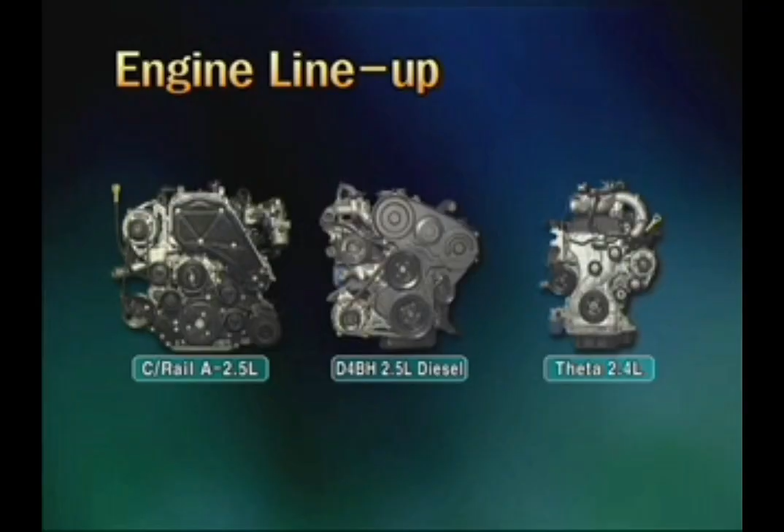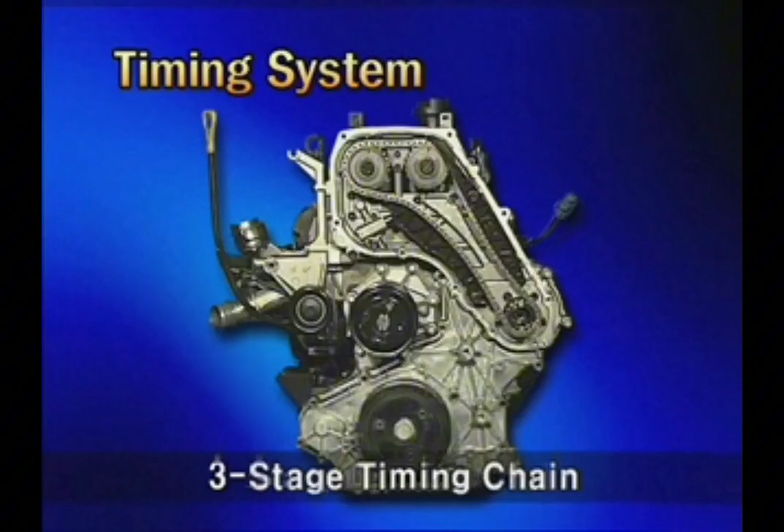The A engine is applied with the single roller bush-type 3-stage timing chain. The components are chain B linking the crankshaft to the oil pump and the RH balance shaft, chain A linking the crankshaft to the high-pressure pump and LH balance shaft, and chain C linking the high-pressure pump to the intake exhaust camshaft. Let's study the timing mark of each chain.

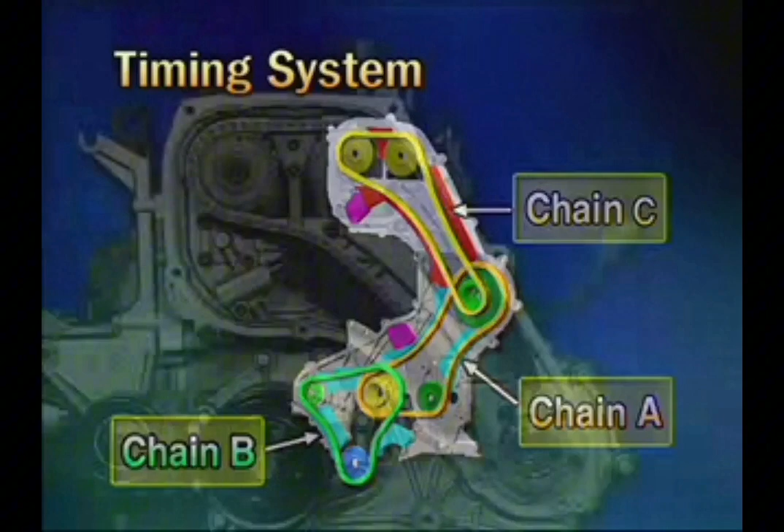First, chain C is for aligning the timing marks of the high-pressure pump and the camshaft. Next, chain B is for aligning the timing marks of the crankshaft and the RH balance shaft. Finally, chain A is for aligning the timing marks of the crankshaft, high-pressure pump, and the LH balance shaft.

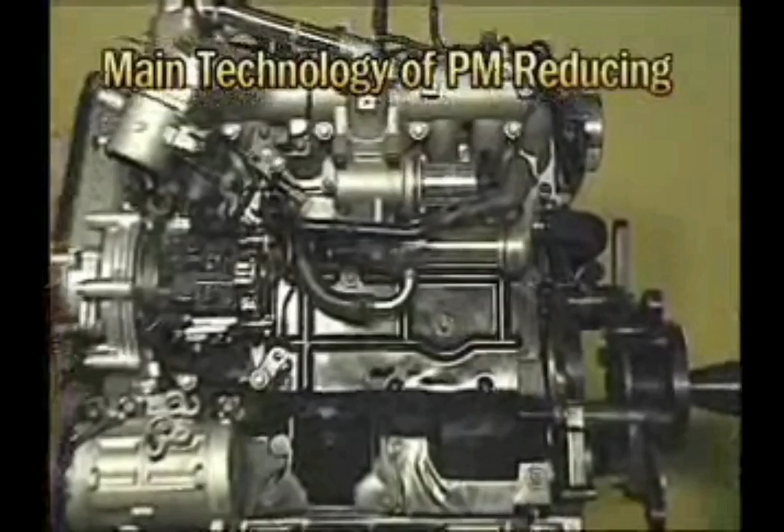For the A engine of the new H1, a water cooling type EGR cooler is installed for decreasing the temperature of exhausted gas which will be recirculated. The EGR valve returns some portion of the exhausted gas to the intake air route for reducing NOx. As the engine ECM receives signals from every sensor, it performs duty control of the EGR solenoid valve to control the amount of air newly inhaled.

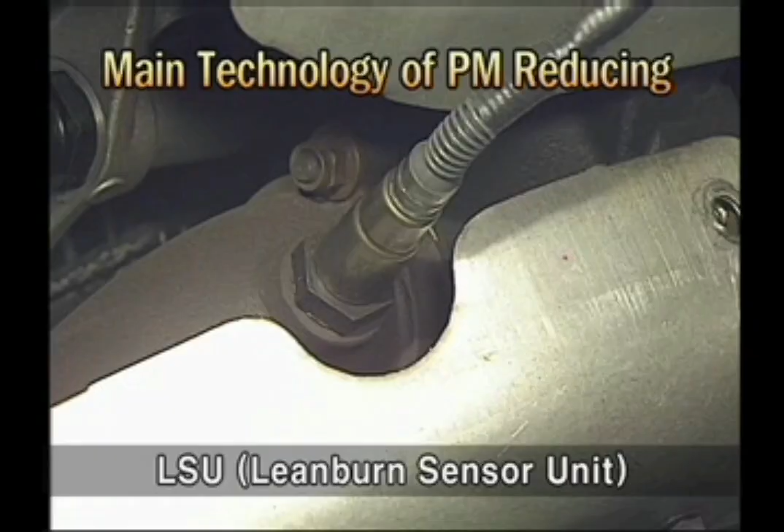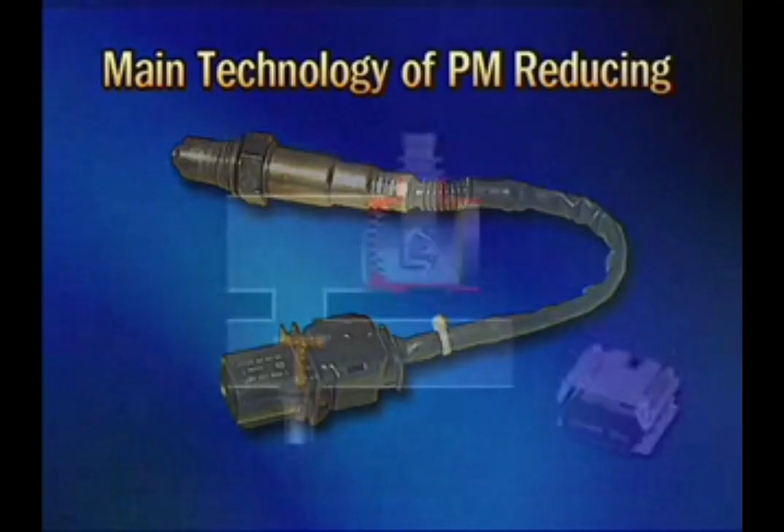Further, the new H1 A engine is equipped with the lean burn sensor unit, an all-range oxygen sensor. The LSU installed in the diesel engine detects the amount of oxygen in the exhausted gas to control the EGR valve. The output value of air amount inhaled into the MAFS, mass airflow sensor, is acquired by subtracting the recirculated amount of exhausted gas from the total air amount inhaled into the combustion chamber.

The ECM estimates the EGR rate using this value. Even though the EGR valve can be controlled similar to the set value at ECM using the EGR rate calculated by this method, it cannot use the feedback concept.

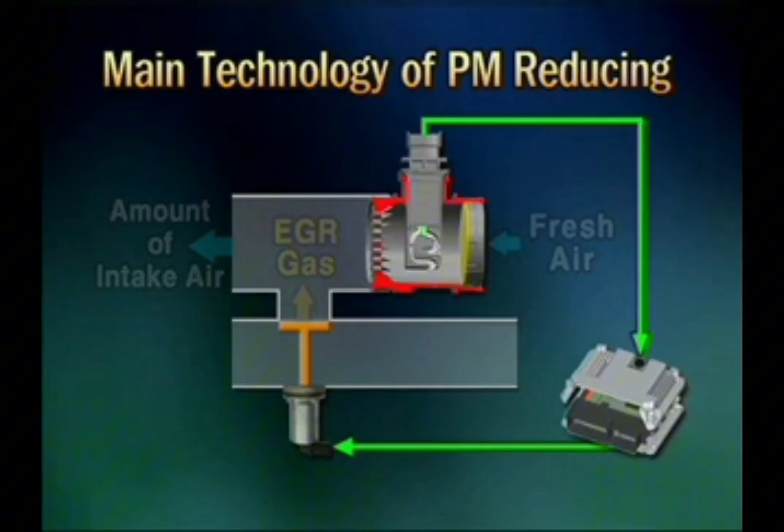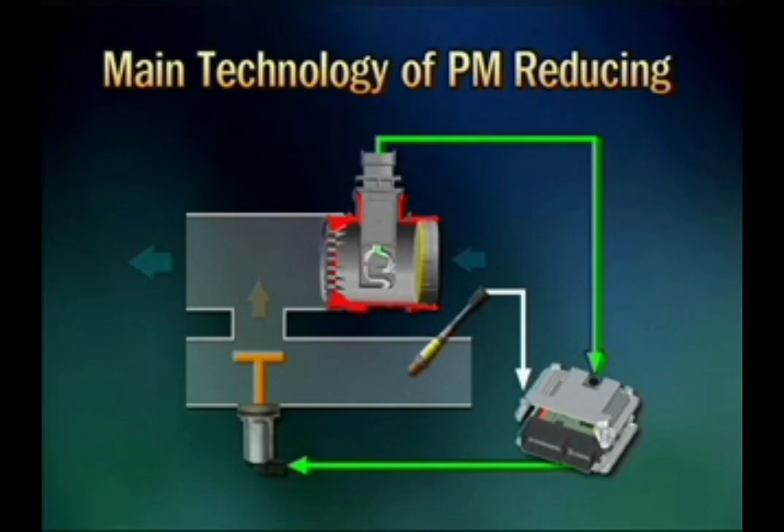Therefore, the new A 2.5 engine has the LSU all-range oxygen sensor for receiving the result of ECM control through the sensor so that the feedback concept can be applied. As a result, precise EGR control and fuel amount control can be ensured.

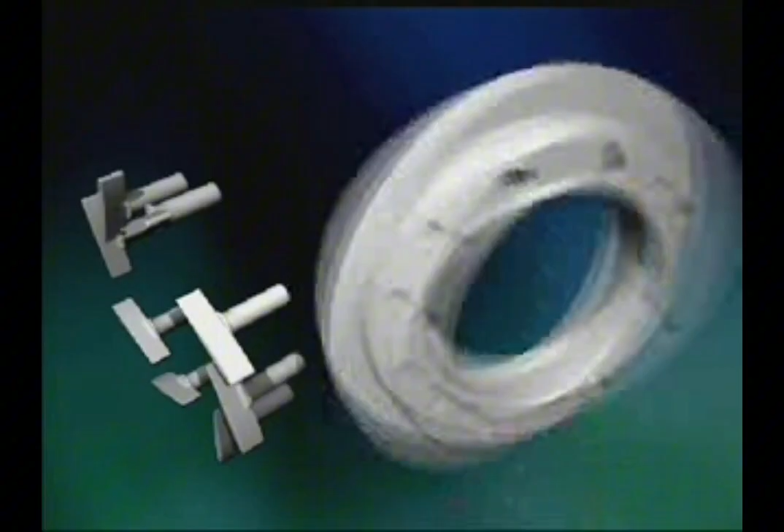The turbocharger of the new H1 A engine is the VGT type, which makes the turbocharging effect at all ranges of engine operation. The internal structure of VGT is comprised of turbocharger units including the variable inlet vane. This VGT is assembled at the turbine housing side.

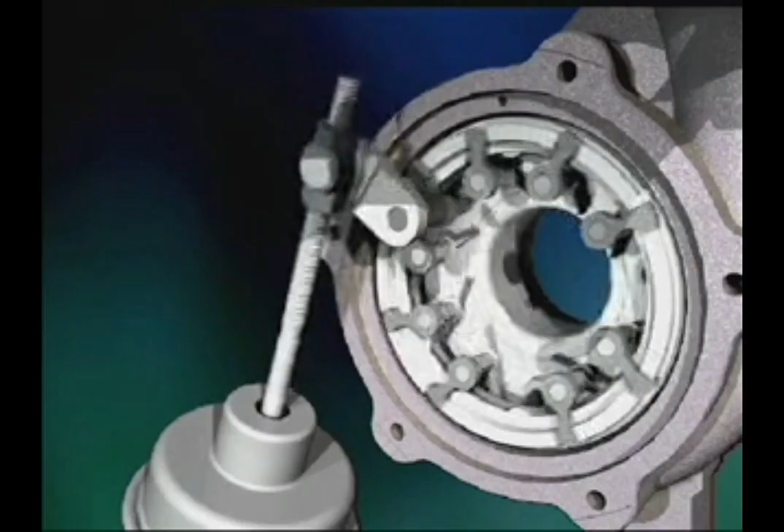The external crank is assembled at the VGT. It is linked to the vane actuator through the link. The turbine shaft having the turbine wheel and compressor wheel is installed here, and then the compressor housing is assembled.

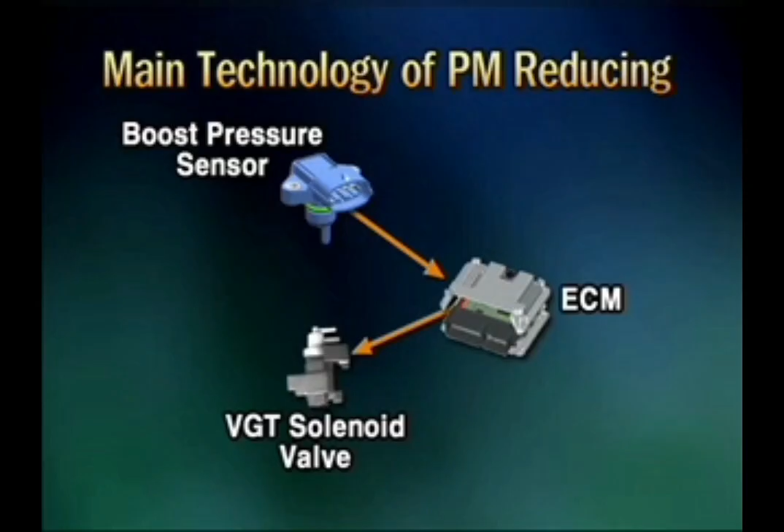The ECM performs the precise duty control of VGT in the H1 engine. The ECM receives input signals from the boost pressure sensor and performs duty control of the VGT solenoid valve to control the vane angle in VGT.

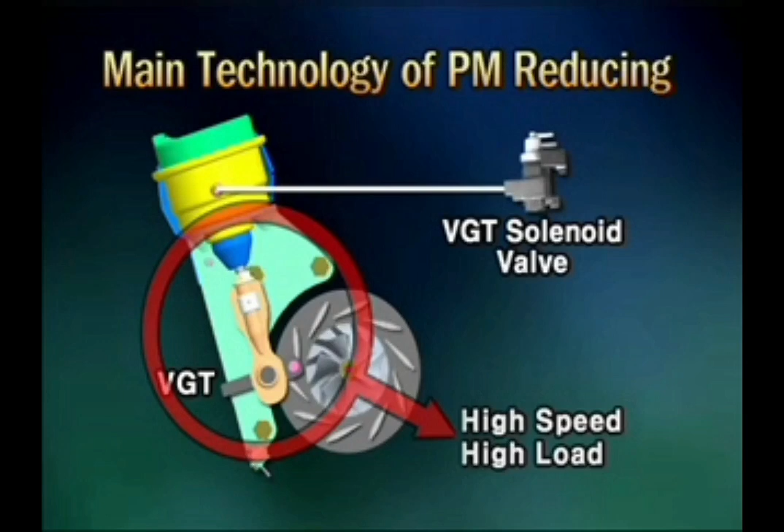At low speed and low load conditions, it opens the angle of the VGT vane small to increase the speed of the compressor wheel so that the turbocharging effect is increased. As it gets to higher speed and higher load conditions, the VGT vane angle gets wider to control turbocharging without overpressure.

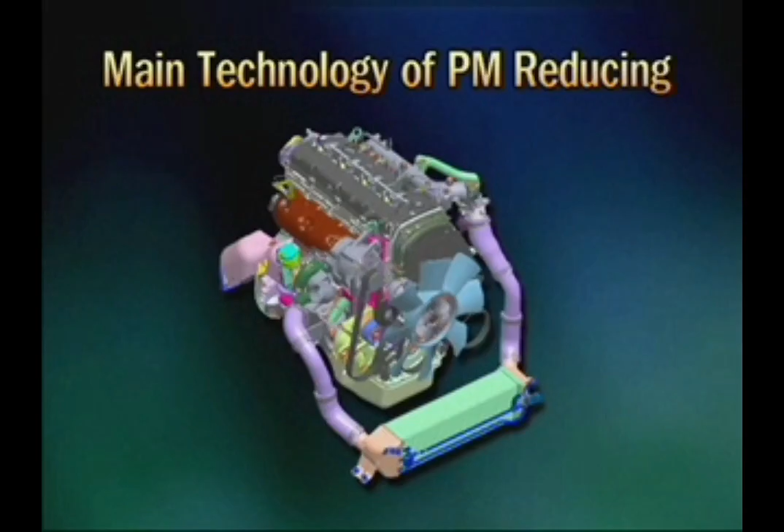The intercooler of the A engine is installed at the front side of the vehicle. The capacity is changed to 5.7 liters, which is 1.5 liters larger than the conventional 4.2 liters. An additional intercooler fan is not installed, but the air temperature in the intercooler can be lowered by the wind generated while driving.

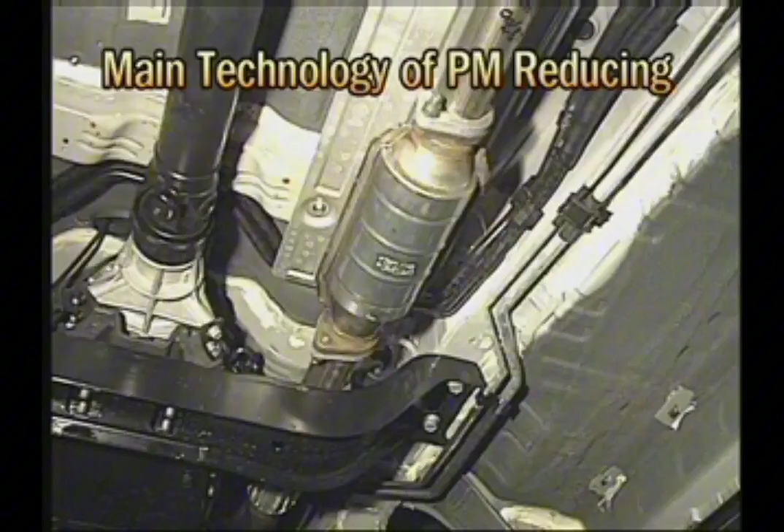The A engine of the new H1 may be equipped with WCC according to the kind of transmission. For manual transmission vehicles, as the temperature of exhausted gas is low at initial driving in cool conditions, CO and HC are highly generated, so the WCC is added to the conventional UCC.

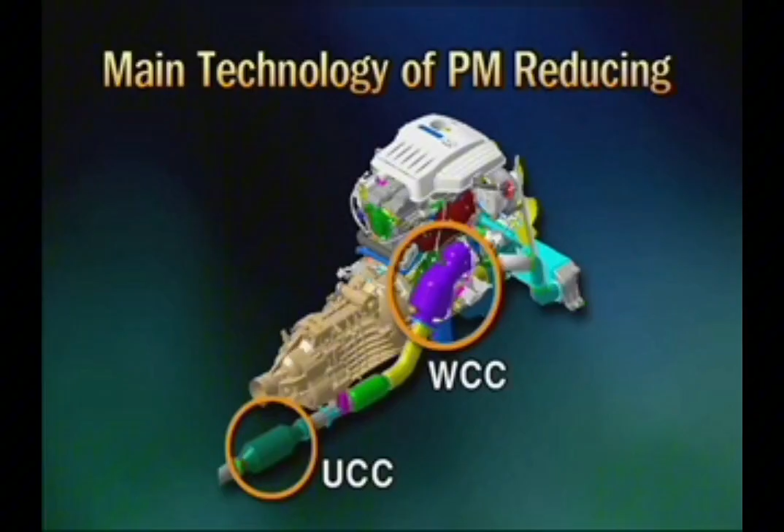When exchanging the catalyst, please notice that the manual transmission UCC and auto transmission UCC have similar shapes, but they are different. Use the correct one.

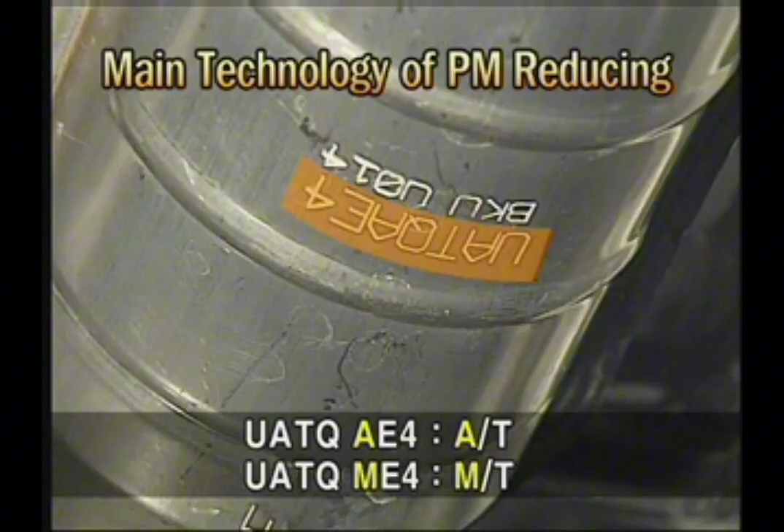The preheating system of the new H1A engine is glow plug type, the same as the conventional one.

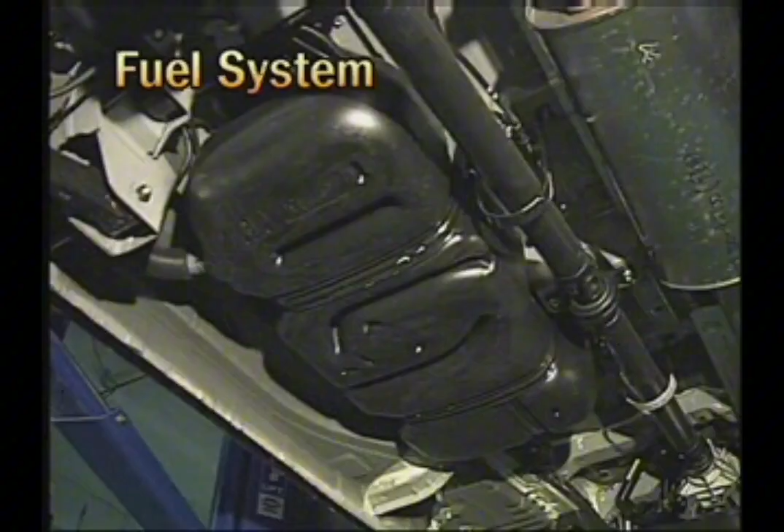Next, we will see the components of the fuel system in the A engine. There is a fuel tank of 75 liters, fuel sender in the fuel tank, fuel filter for filtering foreign material in the fuel, low pressure pump integrated with the high pressure pump, MP-ROP which is the valve for controlling fuel pressure at the inlet port, PRV controlling the high pressure pump common rail and fuel pressure at the outlet port, and injector spraying the high pressed fuel into the combustion chamber.

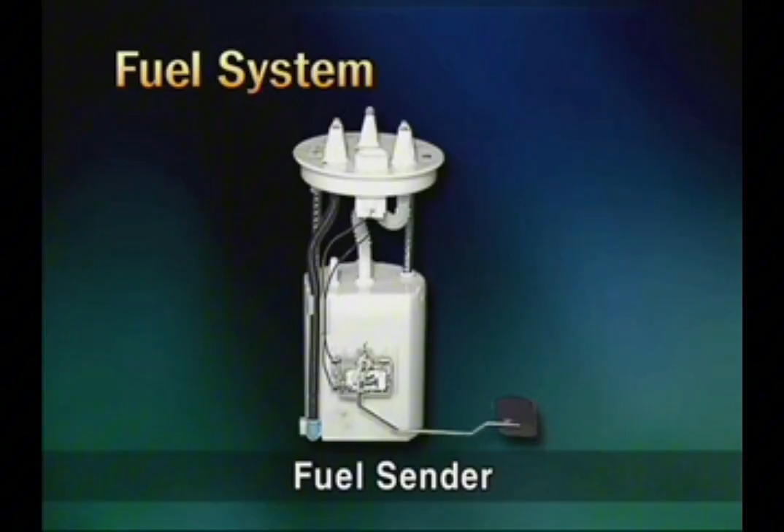At first, the fuel sender is the device for indicating the fuel amount in the fuel tank to the driver on the dashboard. The fuel filter is the device for getting rid of foreign materials from the fuel.

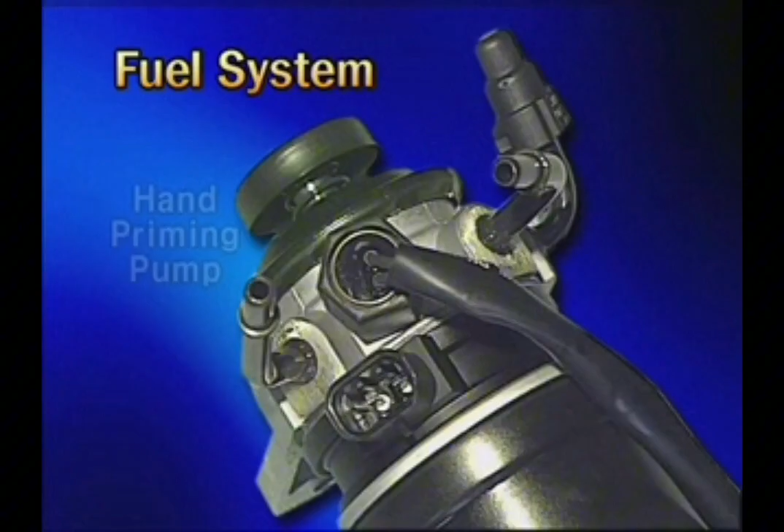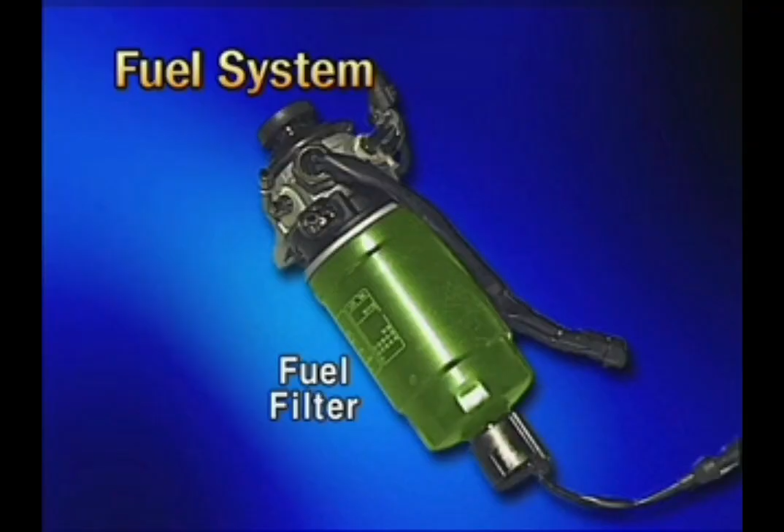The fuel filter consists of a hand priming pump for supplying fuel manually, a fuel heater for preventing paraffin included in the fuel from solidifying in cold conditions, a fuel temperature switch detecting fuel temperature and sending a signal to operate the fuel heater, a fuel filter filtering foreign material, and a water sensor for indicating a moisture alarm at the dashboard when a lot of moisture is mixed into the fuel at the filter.

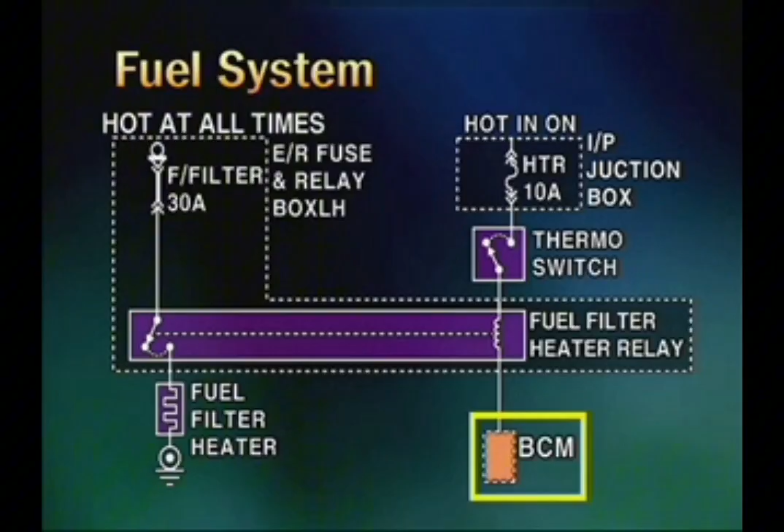The heating for the fuel filter of the new H1A engine is controlled by BCM, unlike the conventional case. BCM drives the fuel filter heater relay for 15 seconds when the ignition 1 signal is input by the driver.

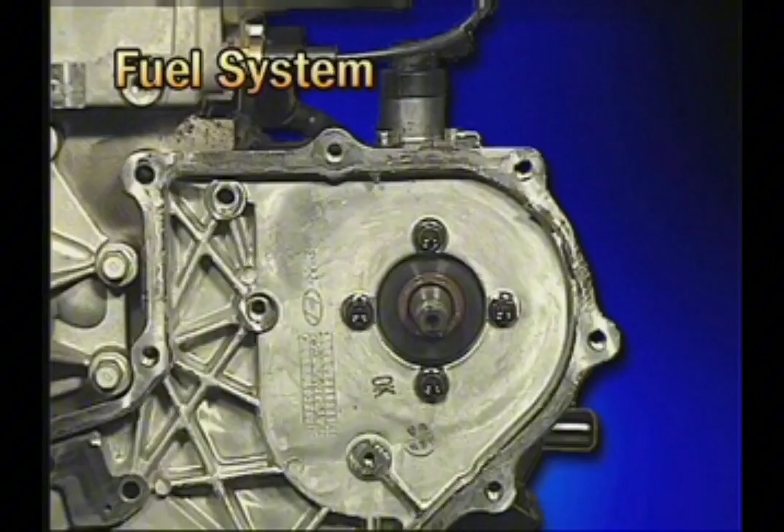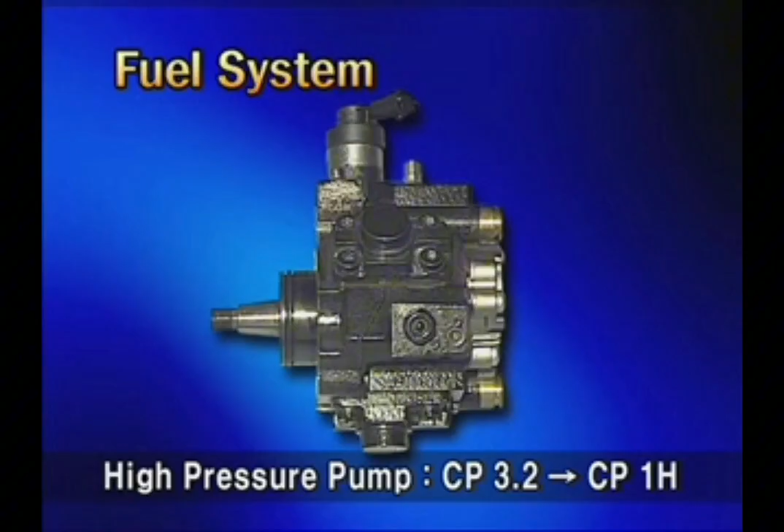The high pressure pump is driven by the timing chain. It plays the role of supplying high pressure fuel to the common rail. The high pump is CP1H type, of which performance is enhanced compared to the conventional CP3.2 type.

The max fuel supplying amount of the CP1H high pressure pump is 843 cubic millimeters per revolution, which is larger than the conventional one, 677 cubic millimeters per revolution.

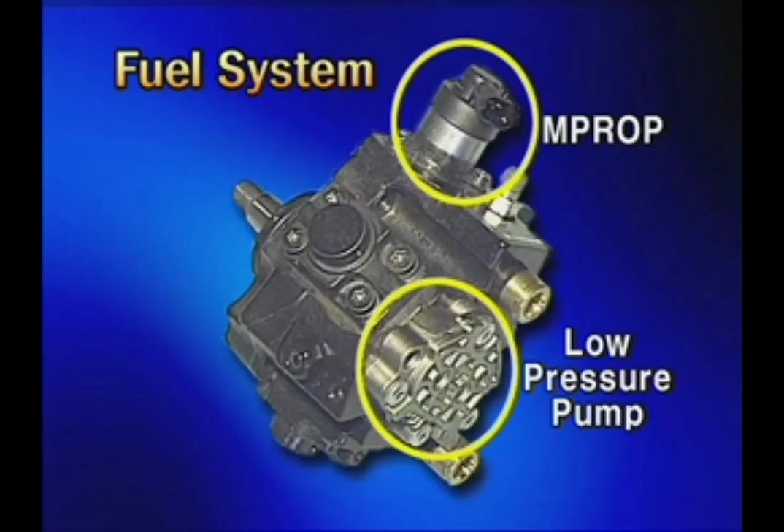In addition, the high pressure pump is equipped with a mechanical low pressure fuel supplying pump and the MPROP controlling fuel pressure at the inlet port. The engine ECM performs the duty control of MPROP to control the fuel amount supplying to the high pressure pump.

When replacing the high pressure pump, reassemble it carefully with regard to the extrusion amount of the sprocket. If it is extruded more or less than the regulated amount, it causes chain noise.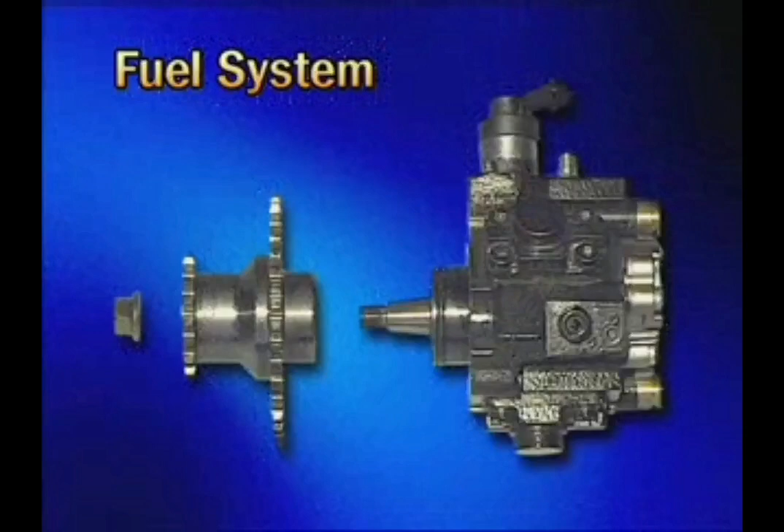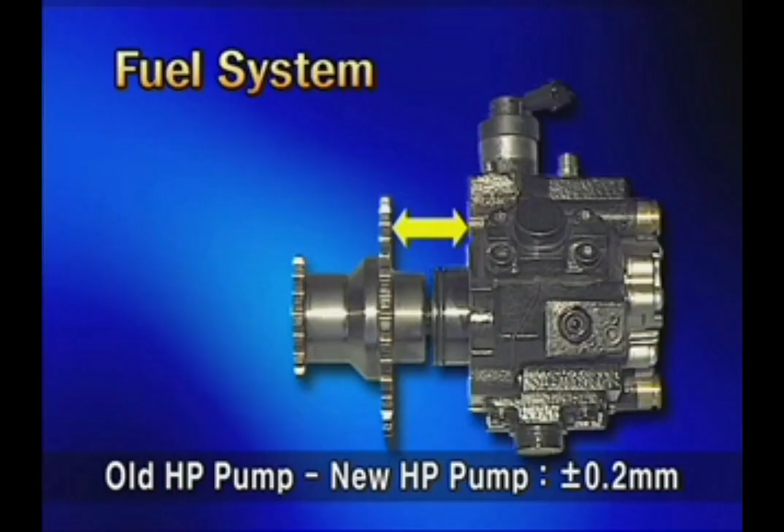In addition, measure the sprocket gaps of the old high-pressure pump and the new high-pressure pump to make the gap comply with the regulation. If it does not satisfy the regulation, exchange it with a graded sprocket to comply with the regulation. Please do not forget this.

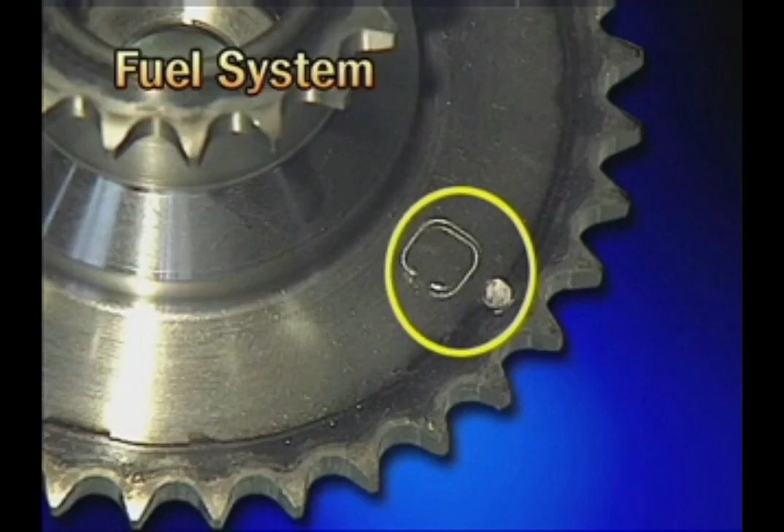The grade of the sprocket distinguishes the protrusion amount according to the arrow mark shown in the figure. There are A, B, and C types for sprocket grade. The specification of each grade is shown in the following table.

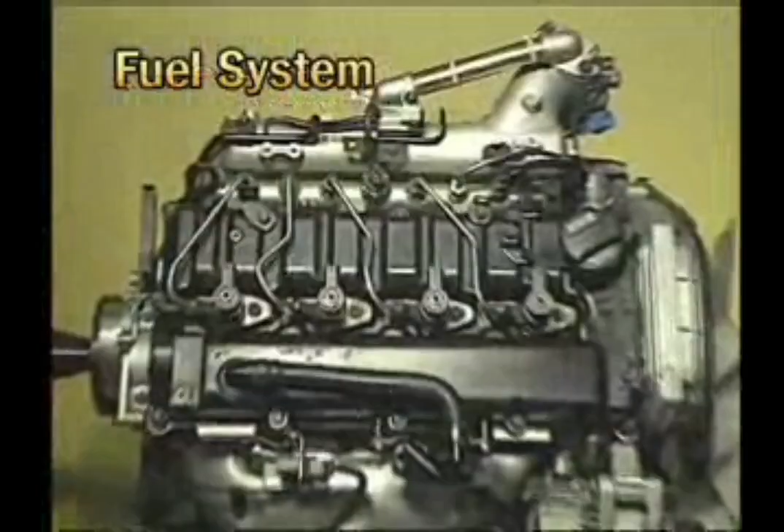The common rail of the new H1A engine is equipped with the fuel pressure sensor and the pressure regulator valve controlling the fuel pressure at the outlet port.

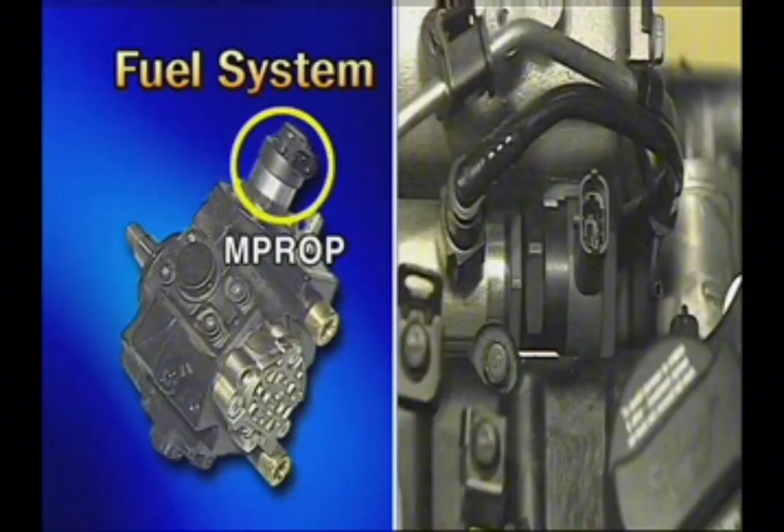ECM controls the max pressure lower than 1,600 bar using the MPROP controlling fuel pressure at the inlet port and the PRV controlling fuel pressure at the outlet port.

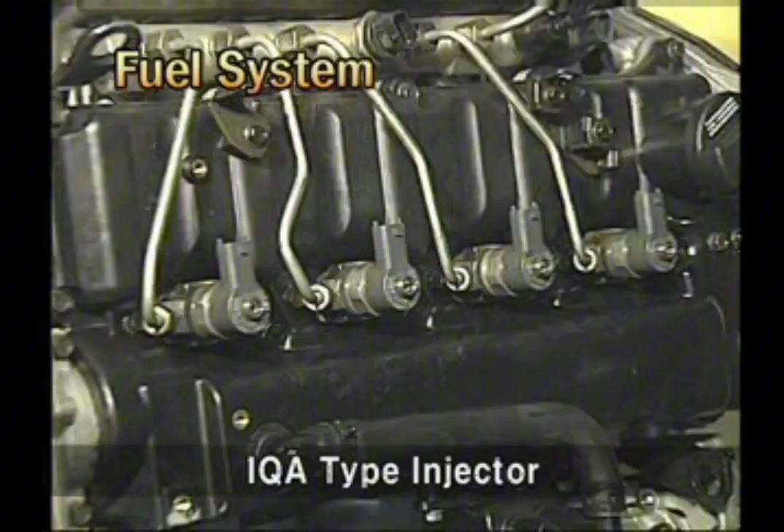The injector of the new H1A engine is equipped with IQA type injector. At each injector, a database code is marked on the upper side. When exchanging an injector, the worker should input the alphanumeric code into the scan tool.

This screen shows the fuel flowing diagram of the A engine. By operation of the low pressure pump installed at the high pressure pump, the fuel in the tank is drawn in through the sender.

The drawn-in fuel is filtered by the fuel filter and supplied to the low-pressure pump. Through MPROP, the fuel amount is controlled and fuel is sent to the high-pressure pump.

The high-pressure pump compresses the low pressure fuel and sends it to the common rail. The common rail accumulates the high-pressure fuel. By the pressure regulator valve installed at the end of the common rail, the high-pressure fuel is controlled.

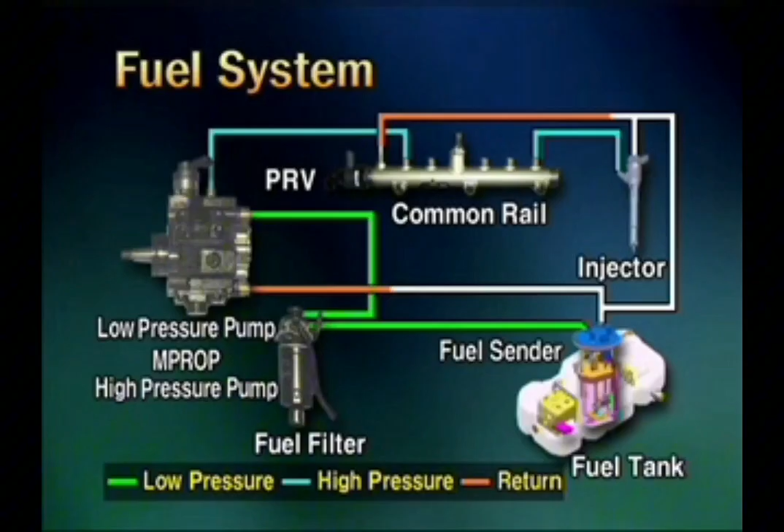The injector is operated by the signal from the engine ECM and performs fuel injection in multi-steps. The electric control unit input system inputs the signals of the crankshaft position sensor for detecting engine RPM and the exact position of the piston.

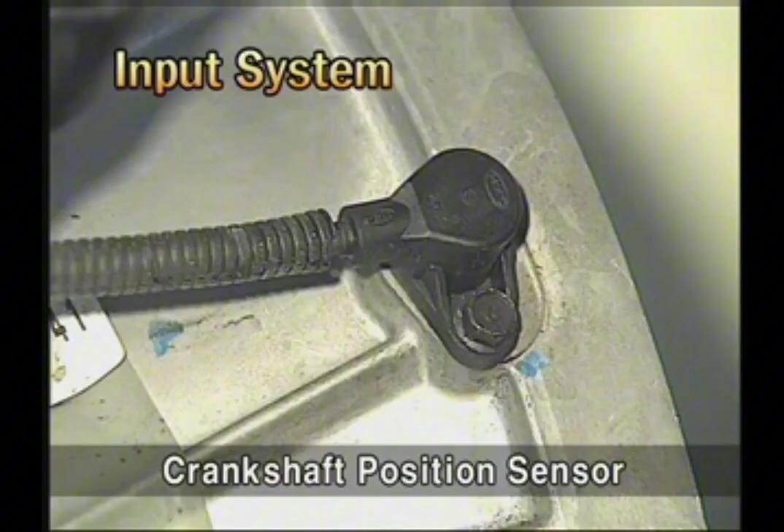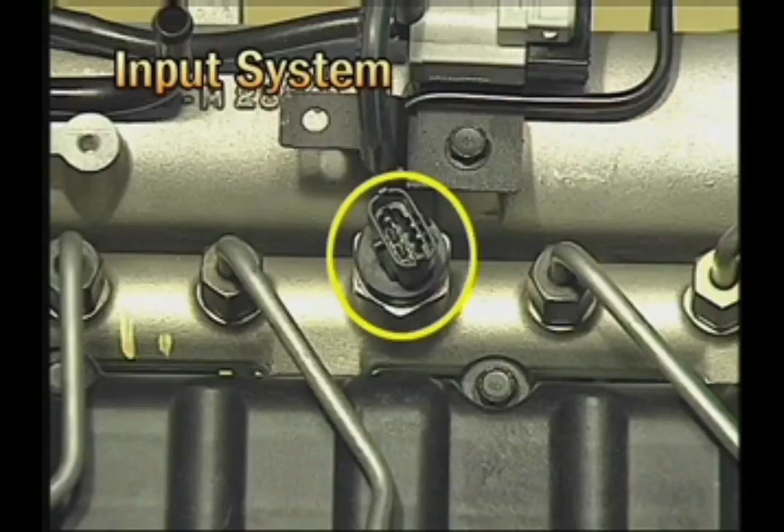The camshaft position sensor distinguishes the positions of number 1 and number 2 cylinder exactly. The fuel pressure sensor detects the pressure of high-pressure fuel to use as the fuel pressure feedback signal. The engine coolant temperature sensor detects coolant temperature. The boost pressure sensor controls the VGT precisely.

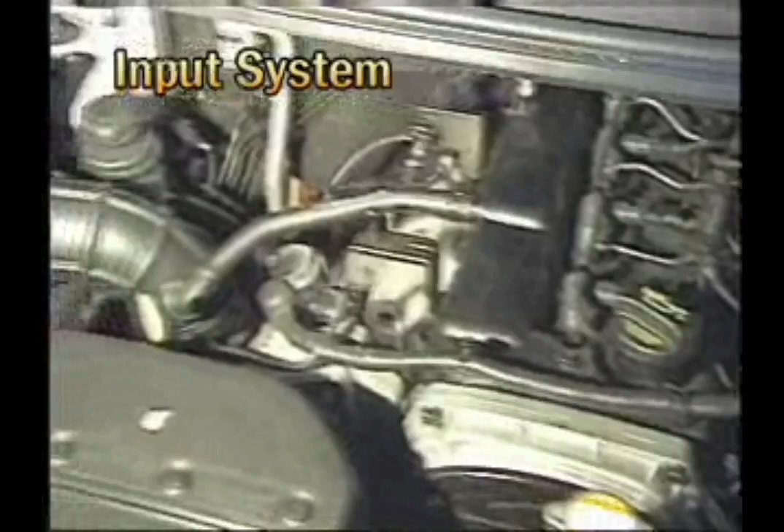The oxygen sensor controls the air and fuel ratio by detecting the oxygen density in the exhausted gas from the exhaust manifold. The mass airflow sensor and intake air temperature sensor detect the air amount flowing into the engine and the temperature of the intake air.

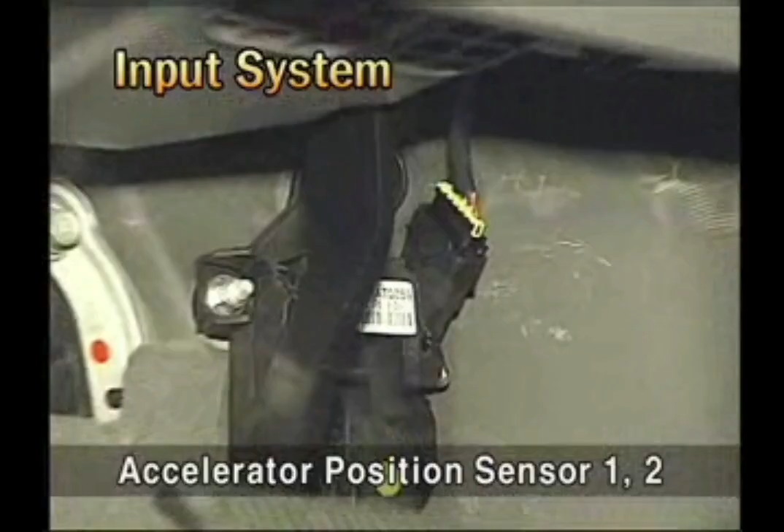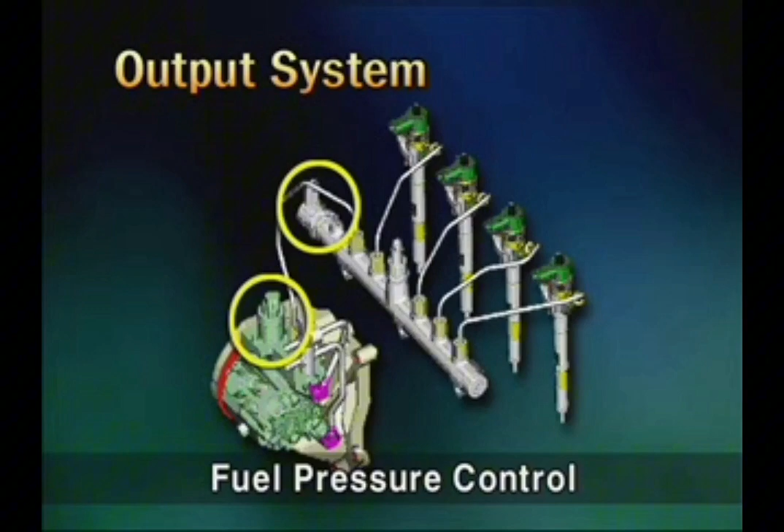The accelerator position 1 and 2 sensors get the driver's intention to the engine ECM. The engine ECM, receiving various signals from every sensor, controls the fuel injection timing through the injector and the fuel amount for changing injection amount. It controls the pressure generated by the common rail using the dual pressure control valve.

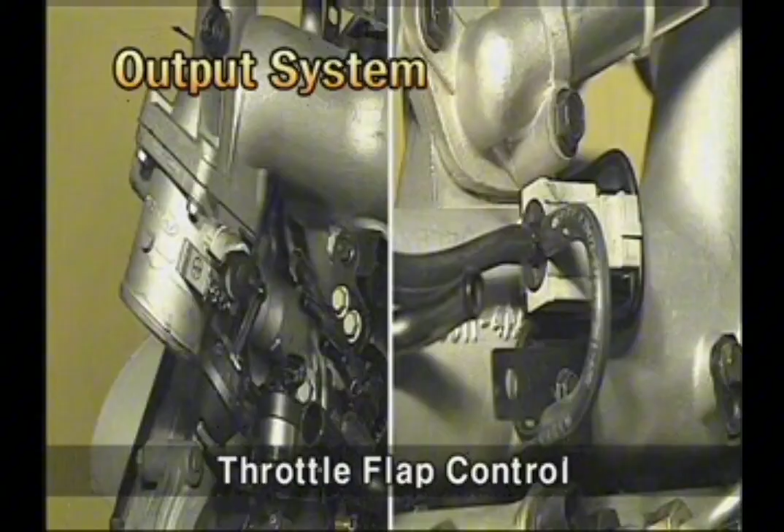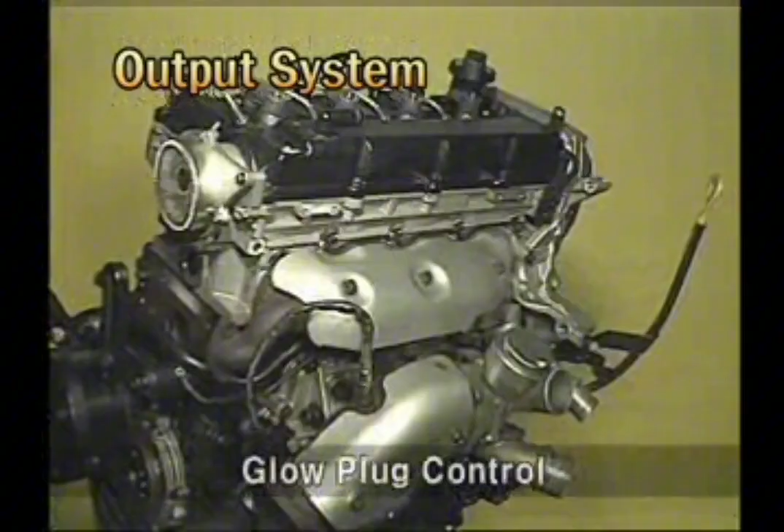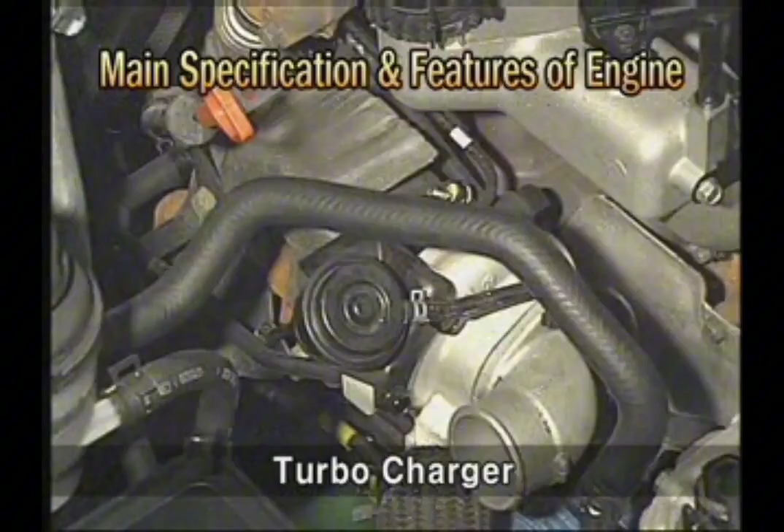It controls the throttle flap for reducing engine vibration at ignition off. It performs EGR control to recirculate the exhausted gas and reduce nitrogen oxide material. It performs glow plug control for enhancing ignition at cold temperatures, maintaining smooth engine rotation and reducing exhaust gas. With the turbocharger using high-pressure exhaust gas, the intake air can be compressed and is cooled by the intercooler. The engine has high output.

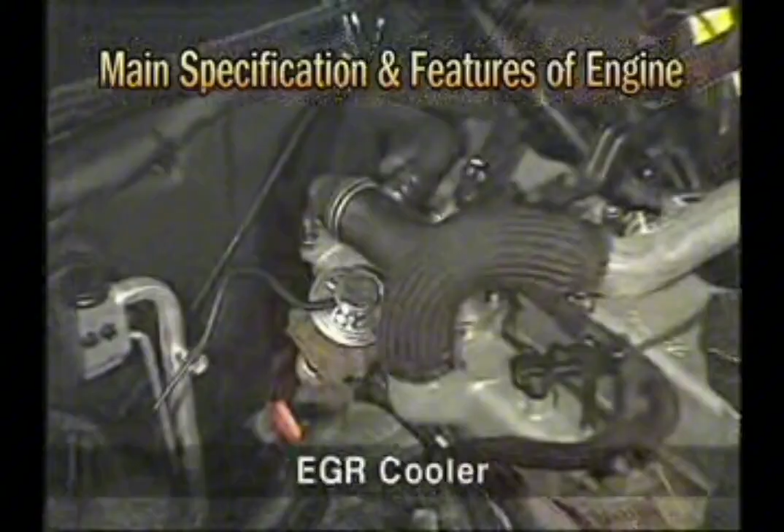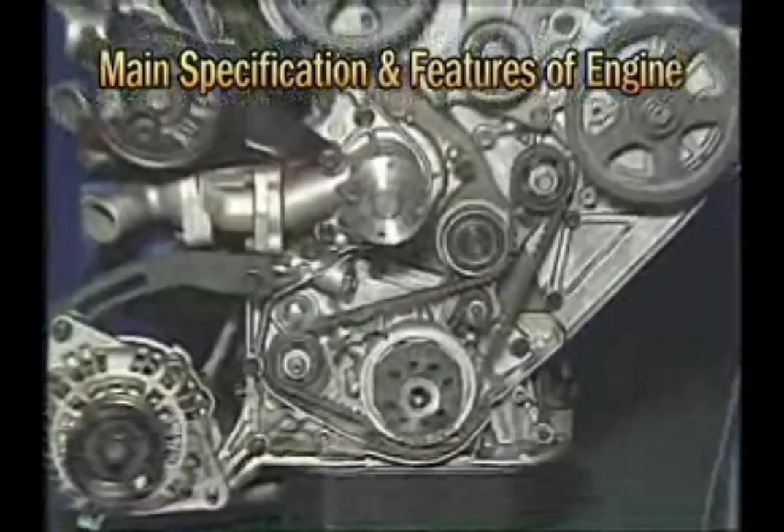Applying the water cooling type EGR cooler, the exhausted gas circulated by the EGR valve is cooled down by force. The combustion chamber temperature can be decreased. Therefore, the nitrogen oxide material can be reduced remarkably. In view of NVH, applying a balance shaft, the engine has less noise.

The D4BH engine is applied with the alternator brace adjusting type. It is easy to perform service and maintenance works for belts. The D4BH engine has 2 timing belts. For the timing of the balance shaft, there are timing marks at the crankshaft and the 2 balance shafts.

For the other timing belt, the timing can be adjusted using the timing marks at the crankshaft, the injector pump, and camshaft.

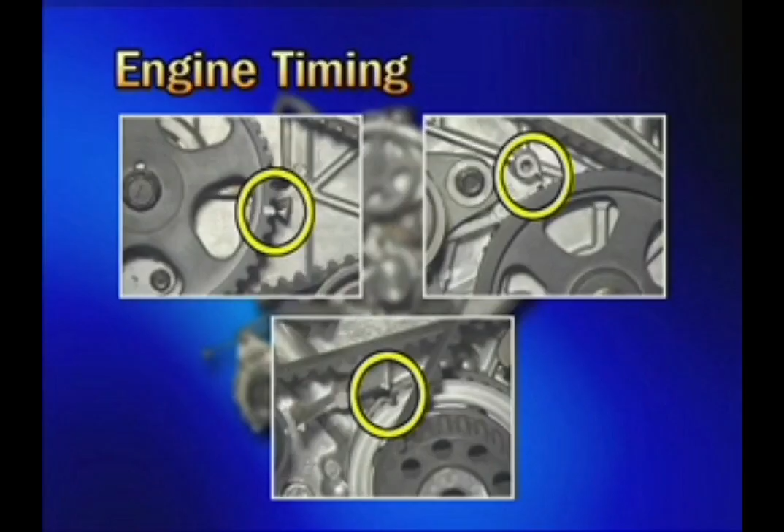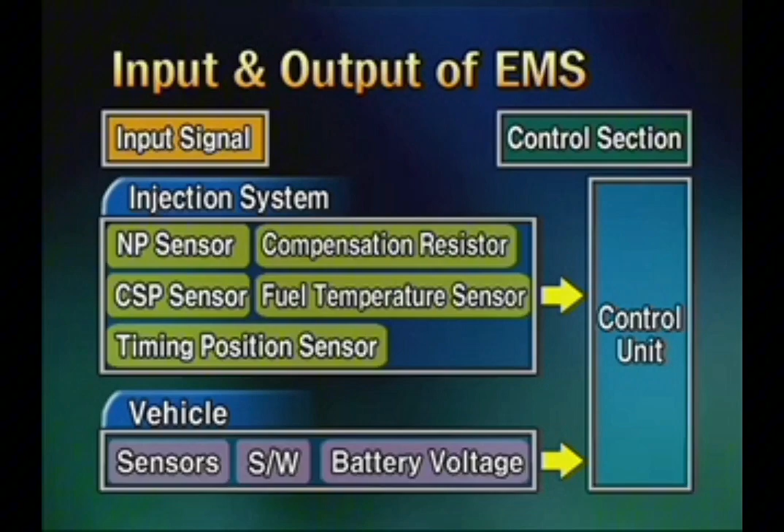This shows the input elements of the ECM. There are 2 groups: one is the sensors and actuators installed at the electric type injection pump, and the other is the sensors installed at the engine and vehicle. Using these various signals from various sensors, the ECM calculates and outputs.

By the GE actuator, the fuel amount can be controlled exactly. By the TCV, timing control valve, the injection timing is controlled precisely.

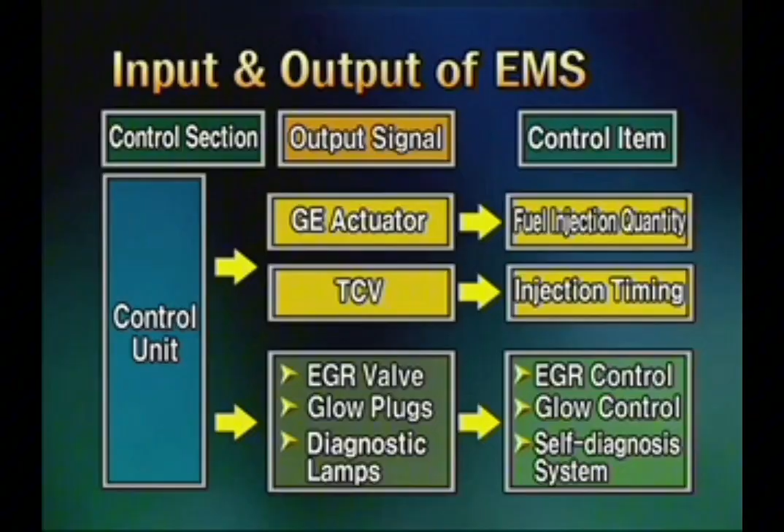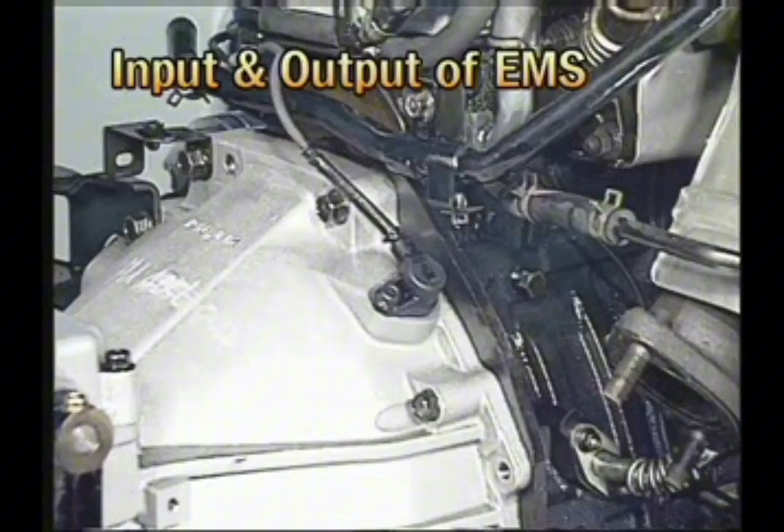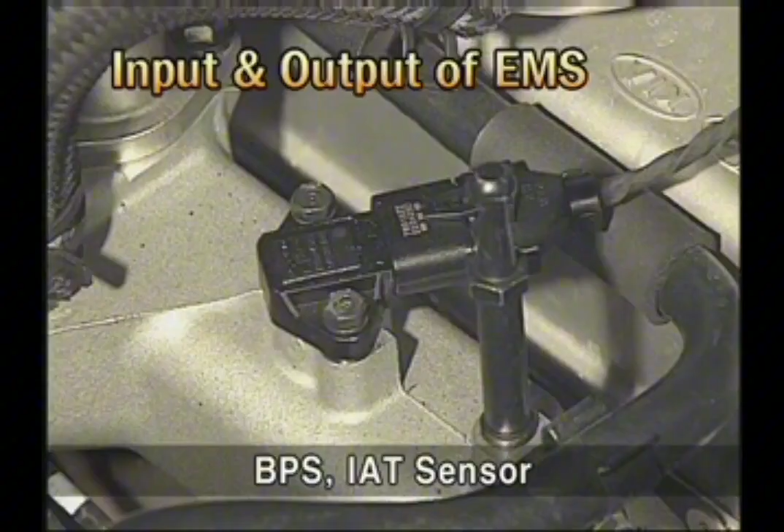Let's study the positions and functions of the input-output elements. CKP is installed at the transmission housing for detecting the engine RPM. Boost pressure sensor and intake air temperature sensor installed at the intake manifold measure the pressure of the booster and temperature of intake air. The coolant temperature sensor compensates the fuel amount by detecting the temperature of the coolant.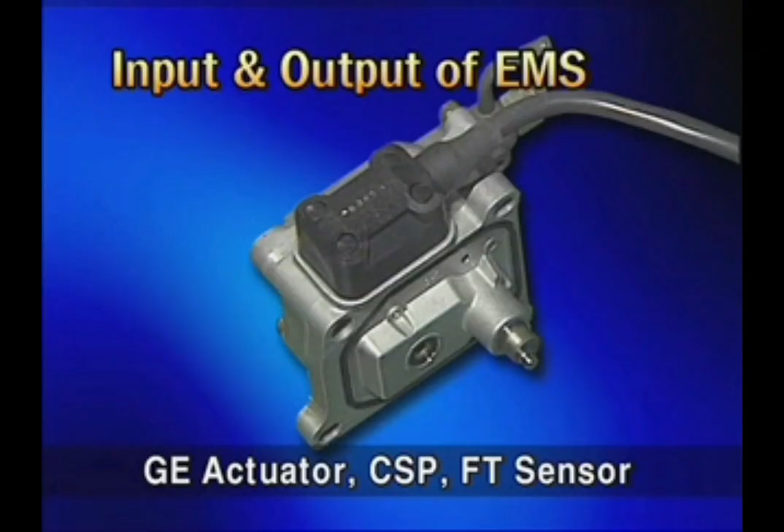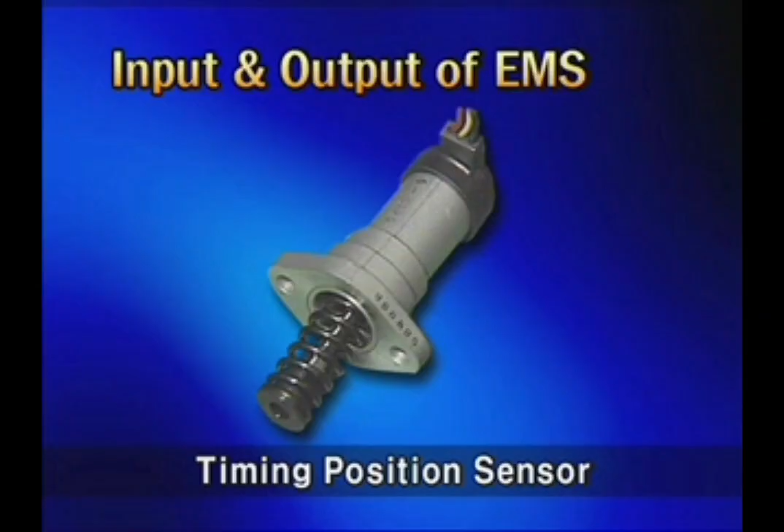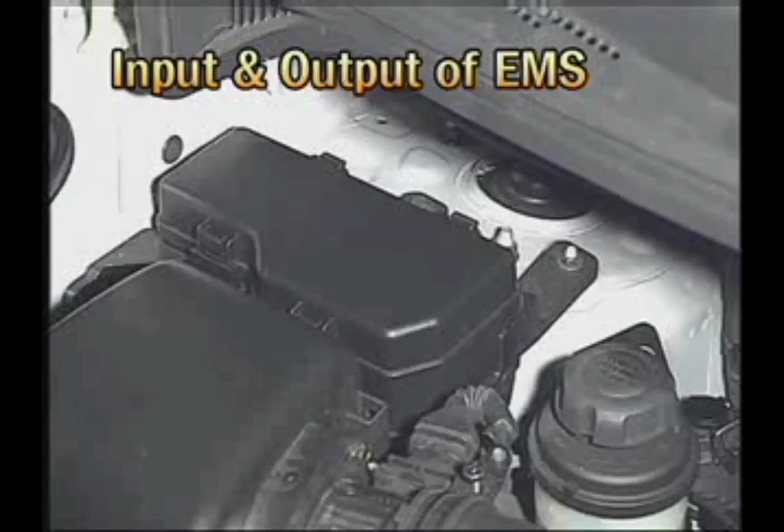TCV is the actuator for controlling the injection timing. TPS, timing position sensor, checks how much the timer piston is moving. The EGR solenoid valve is for hindering the nitrogen oxide amount. The glow relay is installed in the relay box.

Let's study the Theta 2.4-liter engine. The Theta engine was already applied to the NF Sonata. However, the FR-type Theta engine is applied to the H1 for the first time. Therefore, here we will study the FR-type Theta engine.

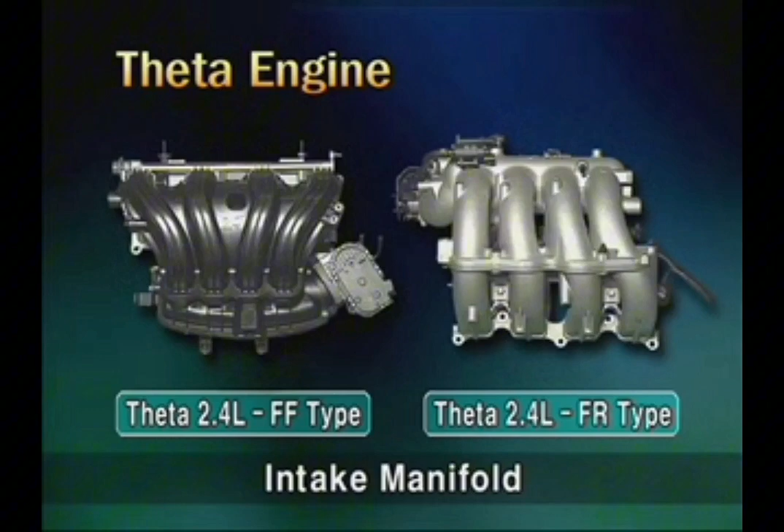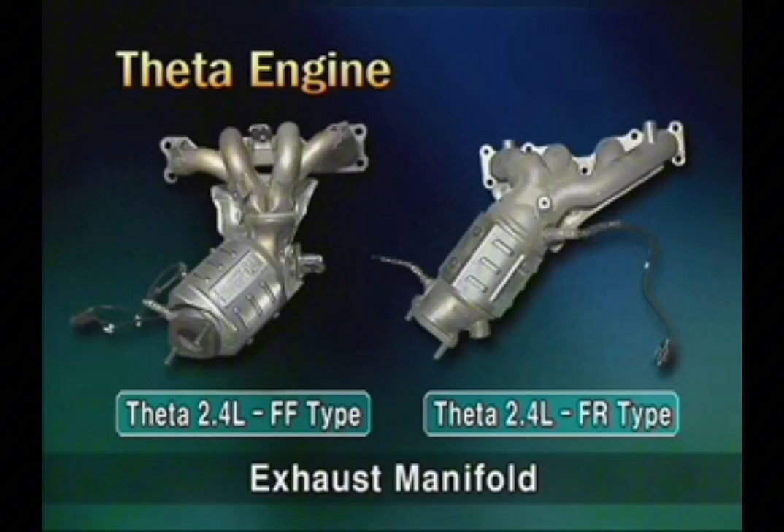Comparing the FF-type and FR-type Theta engines, the intake manifold of the Theta engine applied to the H1 is changed in shape as shown on screen. The material is made of aluminum instead of plastic. The material of the exhaust manifold is changed to cast iron from stainless steel.

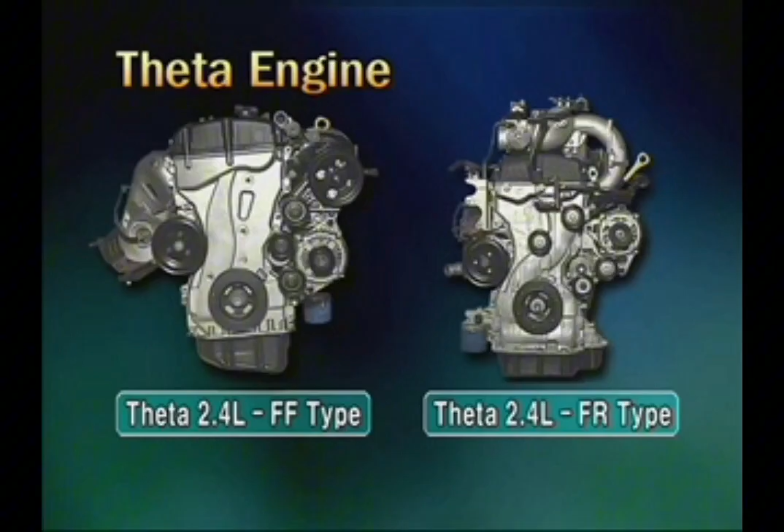In addition, the positions of the alternator and steering pump are changed. The oil filter position is changed also. The Theta engine applied to the H1 is not ETC, but the cable-type throttle body. A MAP sensor is used instead of a MAF sensor.